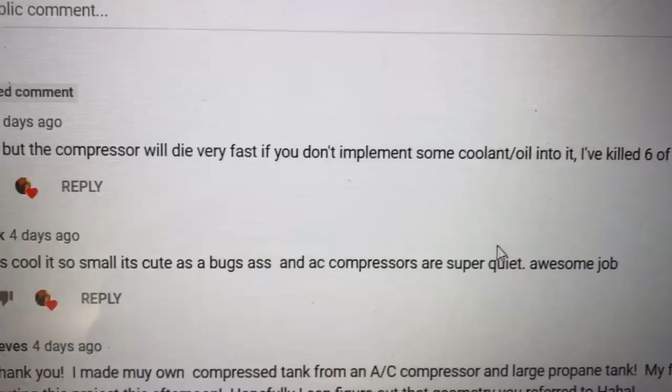Hey, what's up, fellas? This video is for Big Ogre, on behalf of what he said in one of my comment sections, on the AC compressor waste oil burner video. Let's check it out. He tells us the concept is great, but the compressor will die very fast. I've killed 6 of them, he says. So Big Ogre, I've got an idea, man.

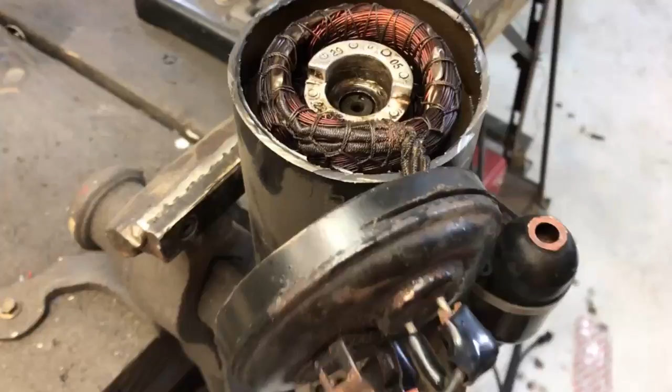Let's check this out. Okay, fellas, I've got one of these compressors chopped open here. We're going to take a look at it. And it appears that the air pressure comes from the center of the axle there. I've got just enough oil in this thing to where it starts to burp up.

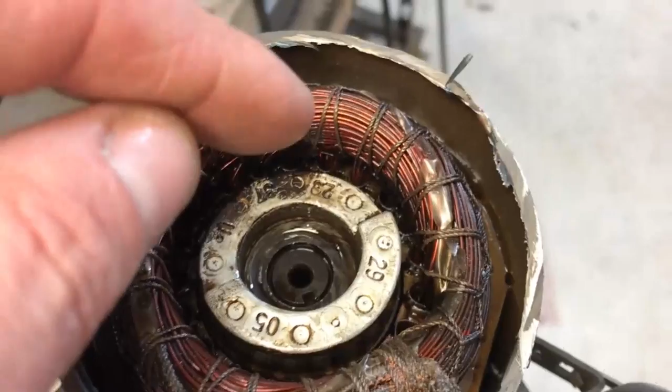Now, I think if we fill one of these up with enough oil to get it to do that, the convection and all that stuff from the oil and just from it sloshing around, the exterior container itself will be able to cool the oil off enough to keep this thing under 150 degrees Fahrenheit. Now, correct me if I'm wrong, I think this may be a class H varnish, which, if my memory serves me, can go up to 180 Celsius, which is hotter than hell. That sounds right, because I have read on the sides of these things before where it says danger, casing may reach temperatures of 360 degrees.

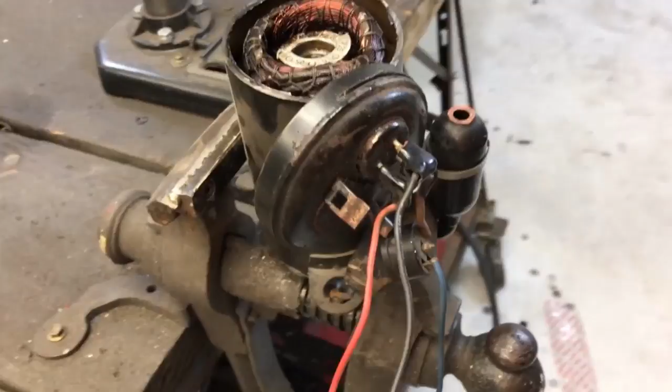I also want to point out something else I discovered during testing. This thermal shutoff switch has about a half ohm of resistance in it. I may take that out of the circuit altogether to increase the efficiency.

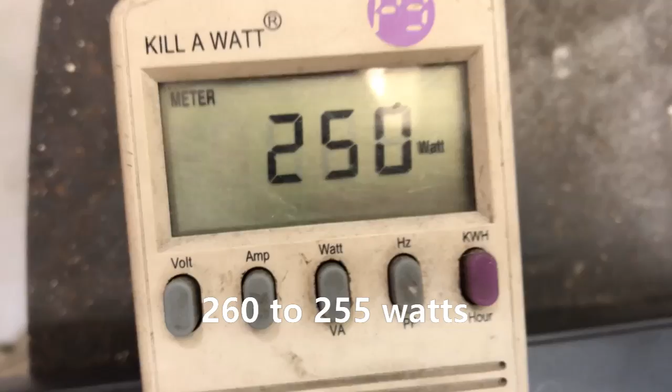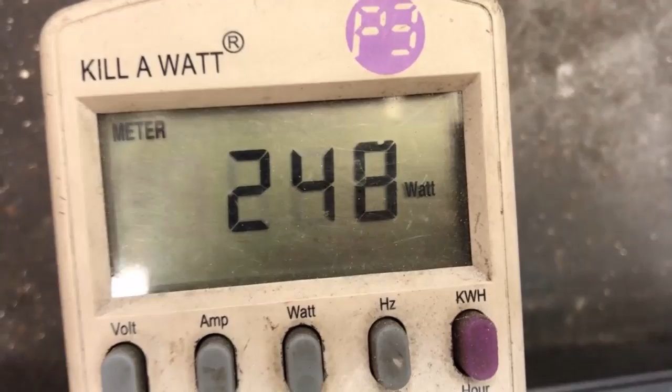Okay, this is the device running without the thermal switch. So we did get a little bit of a decrease in wattage there, guys. At no point was it ever hitting 40, I don't think, was it? I'll have to check the footage again. But we were hitting like 260 on the rig. So there you go.

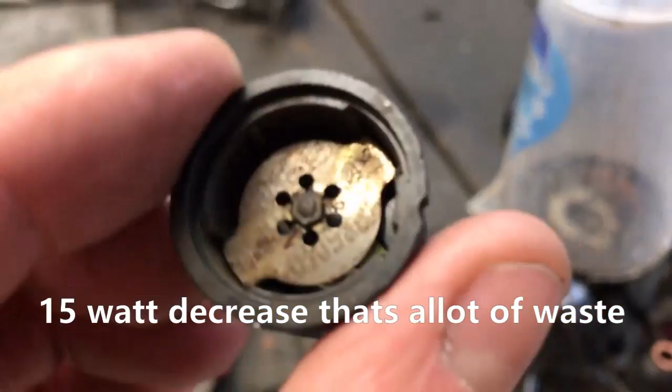Just deleting this thermal switch. They're probably just really old and corroded, guys. I bet you there's a contact surface in here that's got corrosion in it. So if you go to repurpose one of these, just remember that, fellas. I'd almost bet $1,000 that if we took this apart, we would find a contact surface in here which has become just as corroded as the rest of the unit.

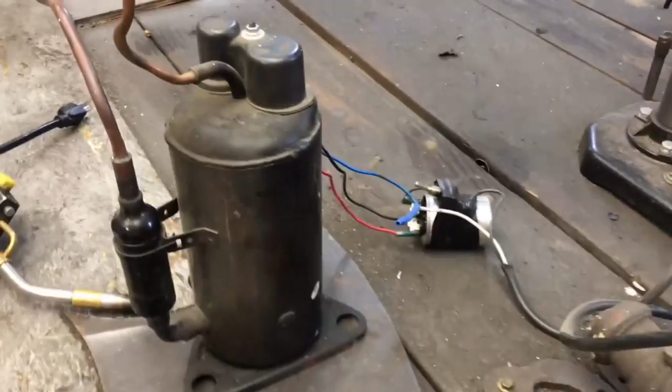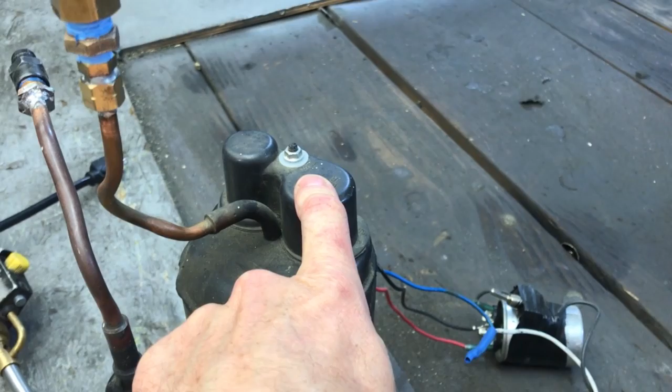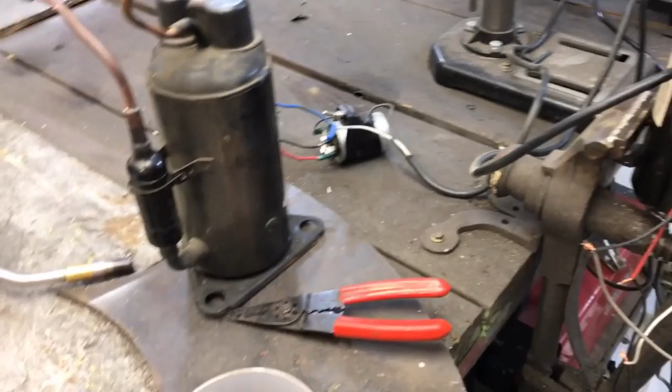Alright, fellas, so let's just make it a point from now on, if we're going to redo one of these, I am definitely taking this thing out of the circuit right away. The corrosion's got me freaked out. This one had 0.5 ohms. It was very low, but it was enough to make me run this test, and we did get some wattage out of that. Not much, we're talking 10 watts at the most, but if you consider the fact that some soldering irons are 25 watts, that's a little bit of heat, you know?

Okay, fellas, so basically what I've done is threaded this piece of 3/16 copper pipe with a number 10, 32 threads per inch. Did the same thing up inside of this sight glass as well, and just coupled it together. So hopefully this works as an oil return line.

I have also drained the tank. It was not easy drilling this hole without getting debris down inside there, I might add. I ended up pressurizing the tank and having it on its side, and for whatever reason I got sprayed with a bunch of oil. I thought it was empty, and I was wrong.

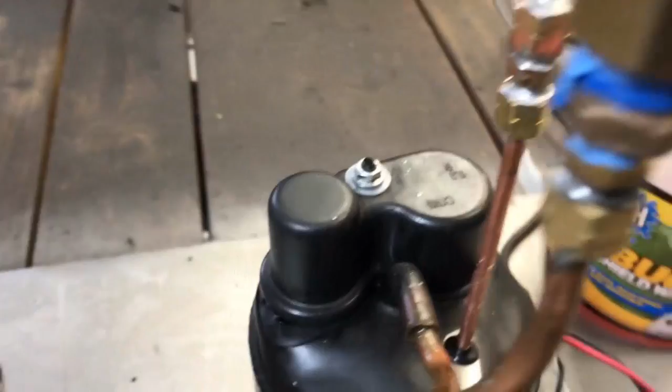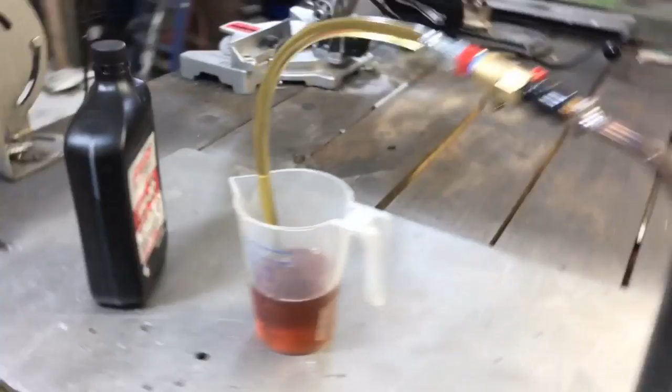Here we go. Wow, it is really having its way with that oil there. It took quite a bit. It is drawing air through this. I just want to give it a second. Okay, I'll give it a little more here. It draws oil quite quickly. Look at that. That's substantial.

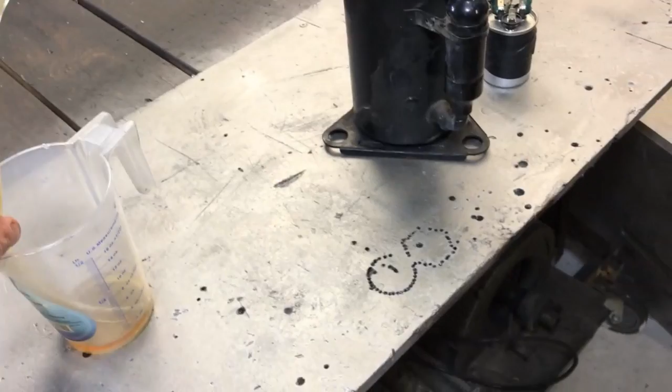This has got to be a miniature scroll compressor. Nothing yet coming up out of the other end. Okay, so we just drank about 12 ounces of fluid there. We're gonna fill it up with another 12 ounces. Here we go. Man, that thing has got an incredible draw.

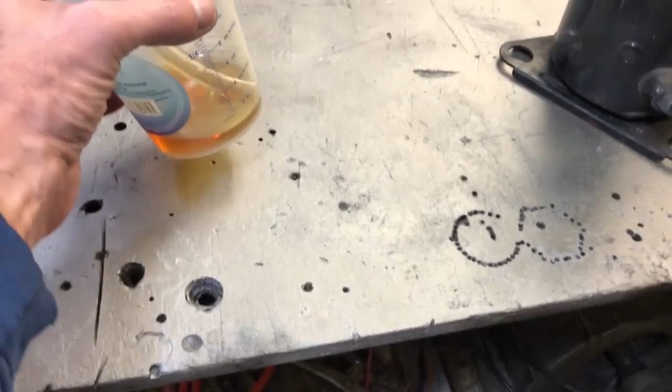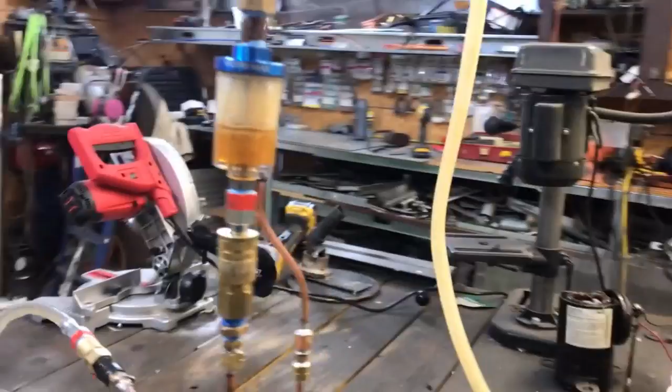Oh crap, there we go. We overdid it just a bit. And we're shooting oil out the ejection. There appears to be a bubble coming out that end, so apparently the flow rate is enough that my oil return line idea isn't gonna work.

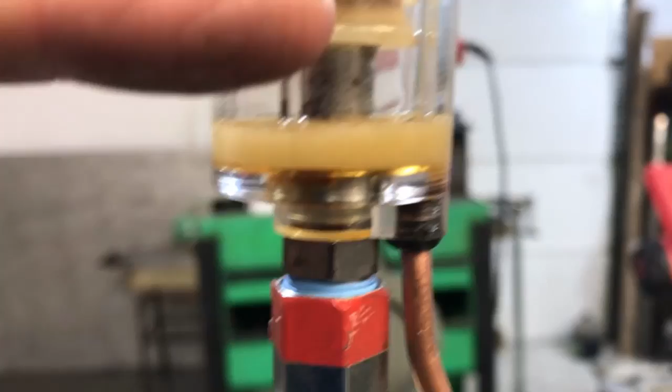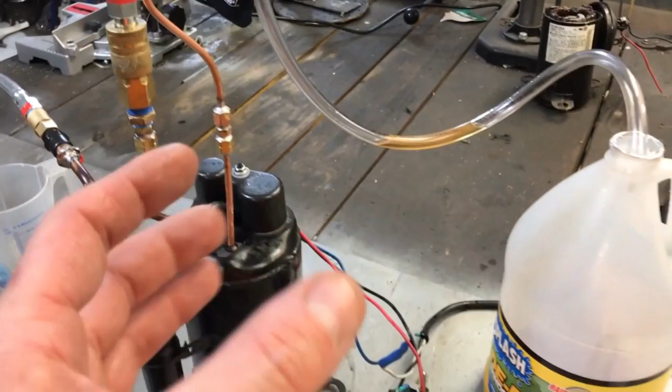Darn it. See if it drains back down in there though, at least. Yes, the oil is draining back down in there. So if we could get just enough oil in there to where the cup rides in this area maybe. I've got an idea. If we induce back pressure on the system, the size, the volume of the flow will be different. So we don't have any backflow being introduced.

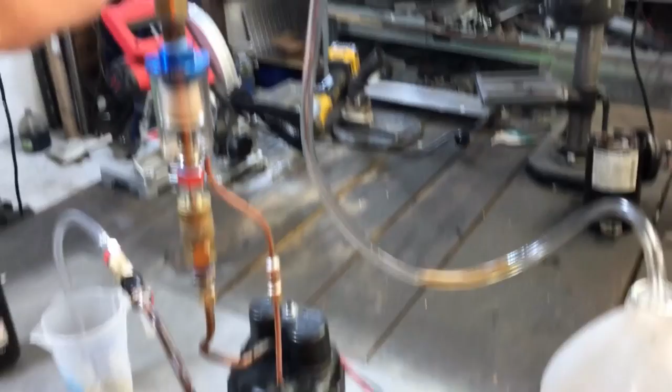Let's introduce some back pressure. So that's with high pressure. Look, no oil shooting up out of here now. But yet we're still getting good flow. Oh wow. Guys, we're getting suction in here. Can you see that?

It's making quite the mist. Dude, that is so cool. Ha! That's too awesome, man.

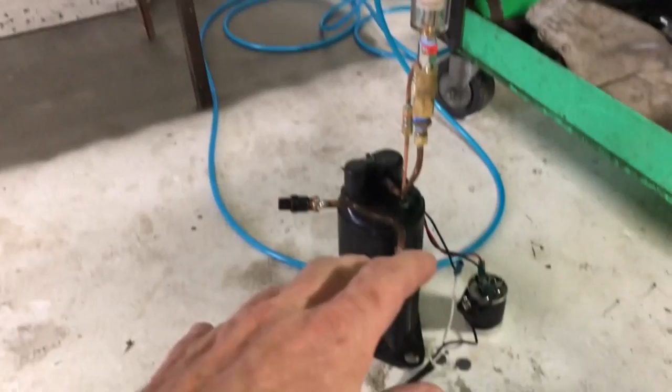Okay, fellas, here's the setup. We're just gonna go for it. I don't want to run any cooling on this thing right now. I want to see how durable these things are. I think it'd be best if we let this thing run and see what temperature it maxes out at.

This is 30 minutes in.

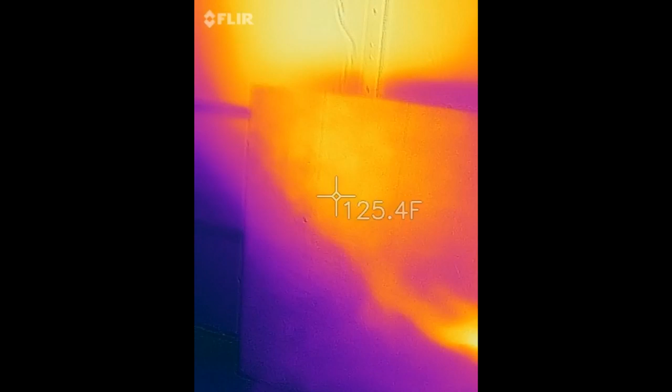Another reason I'm doing this video, fellas, is because I've decided I'm gonna write a small book on oil burners that puts together everything I've learned over the past couple years on this channel. As you guys know, I went full-time with this business, quit my job about a year ago, and I'm just kind of sailing the seven seas here right now.

So definitely a scary ride. It's worth every second of it, but a lot of people ask me for plans on these burners, and I don't really have them per se. They're in my lab book. So what I'm going to do is draft up a small book that I'm going to try and sell as an ebook online or a PDF or an actual really nice book.

I want to make a 150-page book made out of really nice glossy paper, kind of like one of them old chemistry books you used to see from back in the 1960s and 70s. Just a really nice page, really good pictures, high gloss paper with a bunch of really cool diagrams and some stuff like this out of my lab book.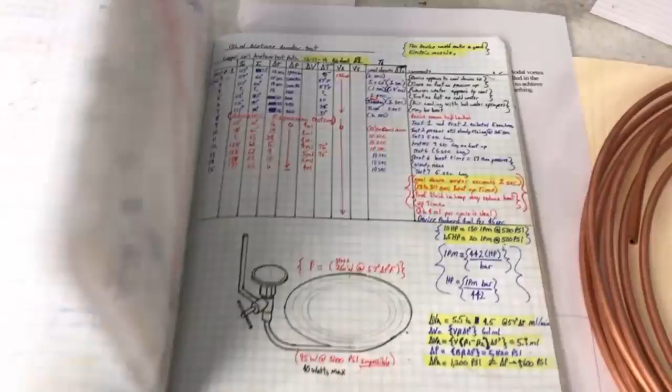All of this information, some of the pictures of this stuff running, the cost to make it - there's a lot of really cool stuff in this lab book that's just hidden away. And I'm not into the patent game, guys. I'm not trying to do that. I just want to help people out who want to build stuff themselves as well.

So there's going to be a lot of stuff out of this book. It's going to be in there. I was working on this diagram earlier. It's going to be chock full of really nice diagrams. My printer ain't working too good here.

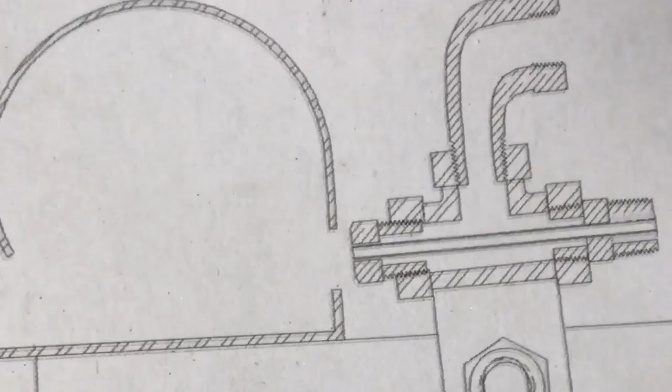But really super detailed diagrams that give you the exact dimensions of everything, where to get the parts. It's going to be a book about this thick, I've decided. But I want it to be a really nice book, man. I don't want to use these crappy yellow pages, like this here. I want it to be the best, most expensive paper I can get my hands on.

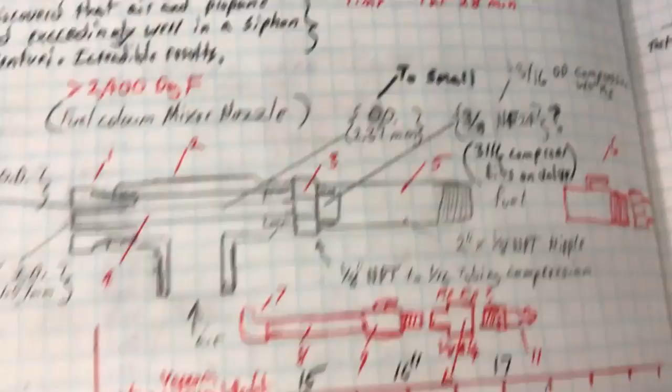I want it to be the type of book that a person is glad to own. And we're going to fill in all of these data sets on all of the burners that I've built, and we're going to just fill this book up full of all the designs and testing that I've done, all of the really serious details of nozzle configuration.

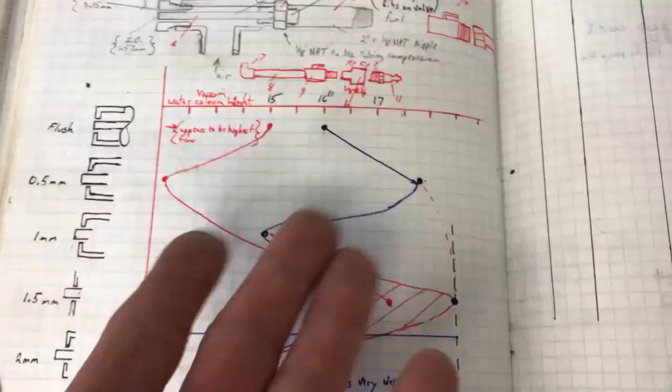We're going to have a lot of graphs and things like that that other people can read. Like, I can read this graph at the drop of a hat, but that's because I'm the author. A common person would look at this and be like, what the hell? And for good reason. But I can relay this in a much more coherent format than this.

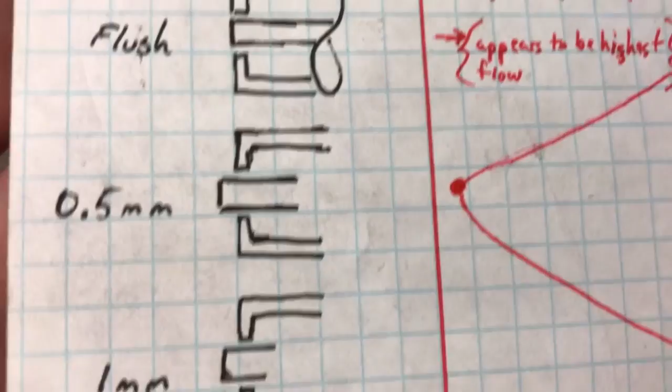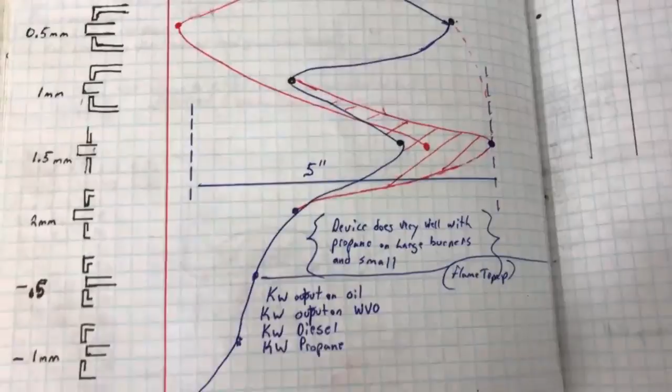This is basically just showing the effects of nozzle position in a Venturi setup. And it comes to find out that flush is in fact the best in most scenarios. But as you can see by this graph, we were definitely getting more draw with the nozzle sticking out. However, at lower settings, it doesn't work very well. So that's why all my nozzles have the interior fuel penstock flush.

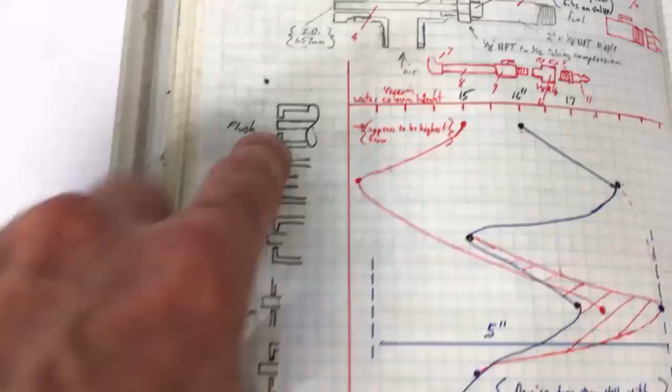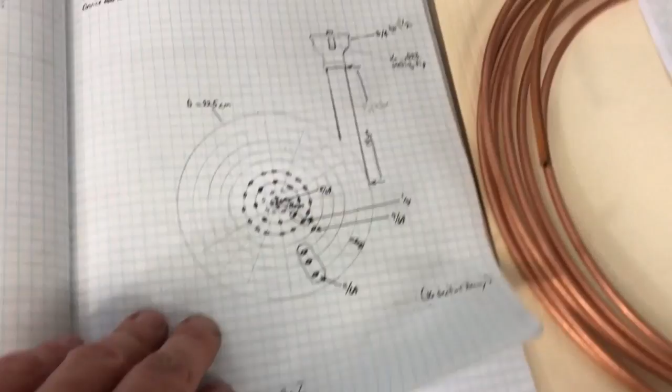Because look at what it does - it's all over the map depending on where you have it. So for the best universal configuration, it's here. This would just be cool stuff to have in that book. I've just got all this information on some exotic burners that I never intend to patent, but yet are just monsters, man. They work so well. So that's what we want to do.

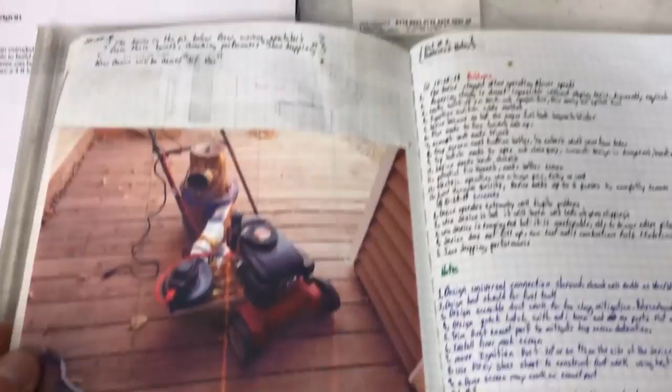It's a pretty cool book, man. I think we need to do something with it. You know what I'm saying?

So here's the scoop, fellas. I've got about 300 friends on YouTube that I comment with on a regular basis, and you guys have been keeping tabs on the crazy stuff going on with my personal life. So just let it be known, the next string of videos we're going to see, except for one review I have to do for a company, are all going to be to populate this book.

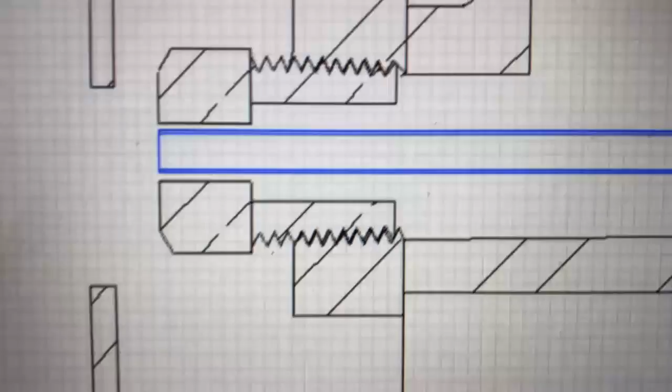Let me show you what we got here. I'm using a pretty cheap QuickCAD software to publish this thing, but I want to put some nice pictures, like of my glass wall experiments. This is a glass wall combustion chamber I did my first Little Dragon combustion burner test on, and it was a really cool video with a lot of really cool information. This is kind of how I want to format the book, with actual pictures of the machines working, as well as complex, easy to see diagrams that give you the exact dimensions, part number, part name, all that kind of stuff.

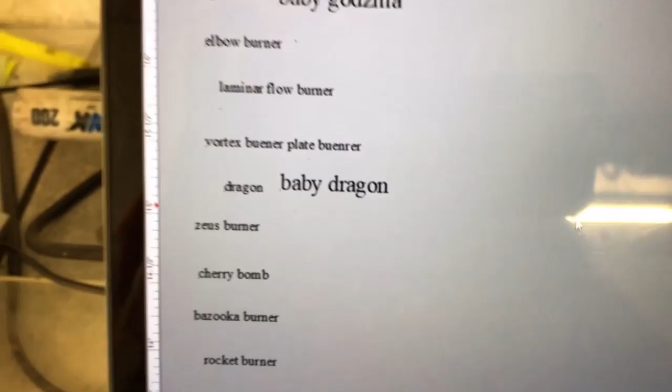And this list here is all the burners that are going to be in the book. We've seen all of these - sorry, I'm looking at the phone like an idiot - all of these burners are on the YouTube channel. But I just think it would be so cool to have these in a book that you can just grab and go straight to the burner you want to build.

I'm thinking about selling books on just specific burners too. So I might just sell a how-to manual on a particular one if you don't want the whole book, you know, like a little $5 PDF or something like that. So that's where I'm going. I'm just trying to do something that's another form of generating income.

Things are doing okay, but I need to amp this up by a factor of 50. We're just screwing around with all these oil burners and stuff, man. I've got ideas so much cooler than this that we could be messing around with, but I don't have the money to do anything with them. I think it'd just be a waste.

I've seen this type of book online that sells for up to $150 for forges and foundries, but they're all gas burners. Burning propane is expensive, man, and I get asked questions all the time from blacksmiths and the like, people wanting to convert because of their tank losing pressure or the cost.

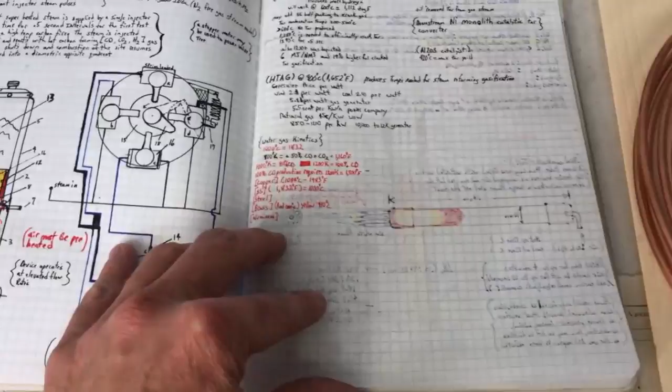So that's what we're going to do. When we come to a page in the book that may require the output of a specific burner, we're going to do a video that day for that page of the book and see what we come up with. We're going to take all the data and information out of this book and use it to make something amazing. I want to write a badass book, man, something that makes you want to pick it up and thumb through it.

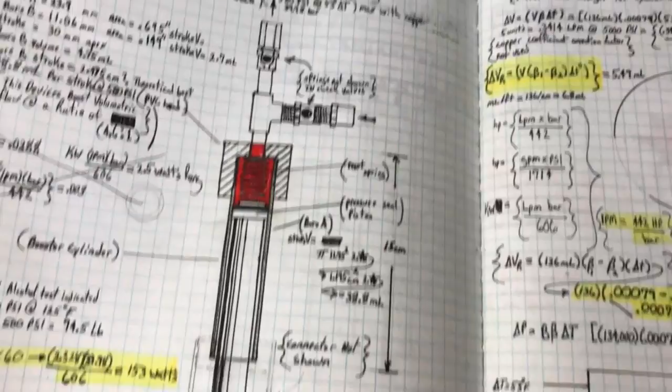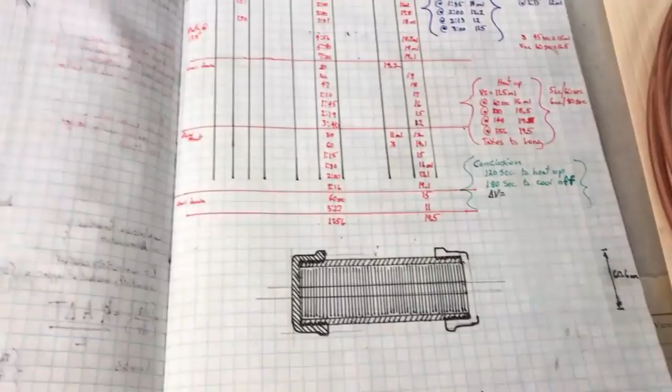When's the last time you picked up an awesome book just full of cool shit that you ain't never seen, man? When I was younger, you didn't have the internet, and I loved these kind of books, and they just don't exist anymore. It's something I gotta do, guys. I want to do it. I think there's a lot of stuff in here that isn't going in the book, but for the most part, man, I just think it'd be a huge waste not to.

So for you group of guys I've been talking with on a regular basis, give me your input on this. What do you guys think about this oil burner book? It's not just going to be oil burners, you know I don't do just that - it's going to be propane, all that stuff, showing you how to get out of any problem you might encounter in any process that requires a lot of heat. So I just don't know if it would be a wise idea to try and write a book this day and age. I mean, there's ones on Amazon that seem to be selling for $150, used for $75, for a foundry burner book.

Pretty cool books. I just don't know if anyone would buy it, so it could be a huge waste of my time. But I've got to try to find another way to generate income around here. We're puttering along, man, and I need to find something to kick it into fifth gear here.

So tell me what you think, fellas. Should I mess with this? Is this a waste of time? I mean, there's some really cool stuff in that lab book, and there's a lot of incoherent babbling all over my channel that in the right hands, someone with patience, someone with focus...

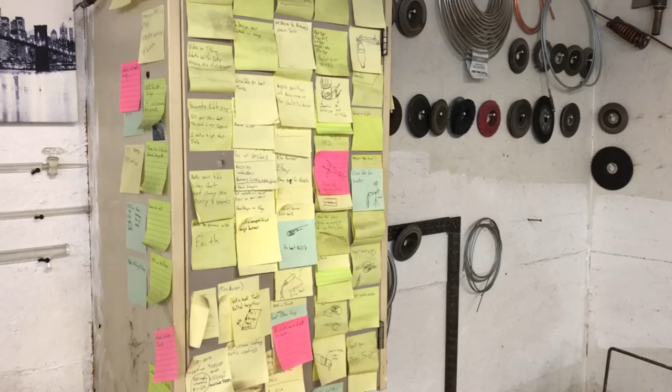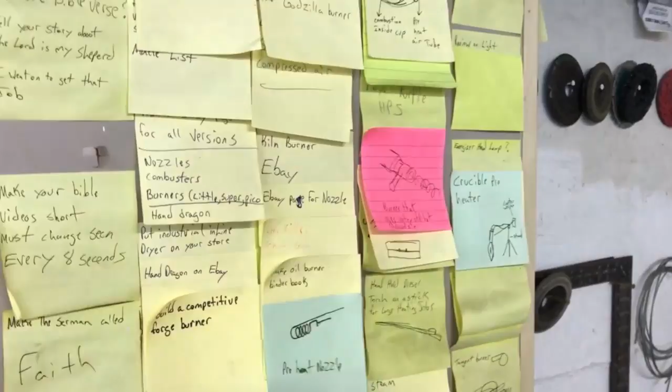That is not focus. Dude, I got Post-its on top of Post-its here, man. I'm never gonna finish. Are you kidding me, bro? Yeah, I'll get right on that tomorrow, brother. I've just got too many damn ideas, and it's not a good thing. It's not, because you just end up awash. I get carried away by the next exciting adventure without ever finishing the first journey.

So we're going to do this oil burner book one way or the other. And here's the thing, even if the book sucks in the sense that it doesn't sell, a lot of cool things don't sell, they're just, the pricing's bad. I will have that book to answer the questions that all my customers have. Just be able to flip it open, bam. I can kind of do that now, but things are a little scattered, and you got to know how to read Egyptian hieroglyphs sometimes.

So that's what I'm going to do, guys. I'm not going to be a prick and hide all my secrets to make money and sell burners to people who are fully capable of building their own. I'd rather just ruin the market for anyone else who might think of starting the business, spread the secrets everywhere, and help out people who want to build their own. You know what I mean? There's always that group of people who can't build their own, first of all, either because it would require them to buy about $1,000 worth of tools to do that.

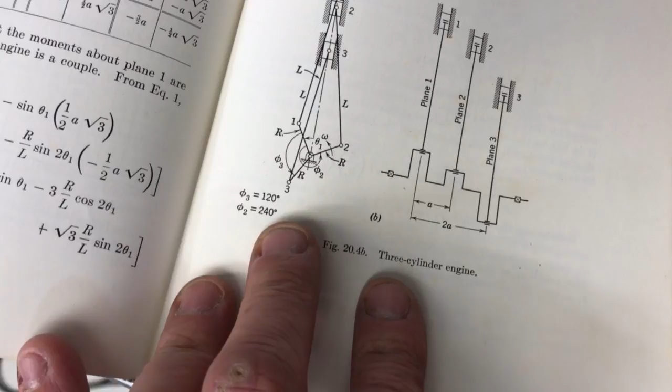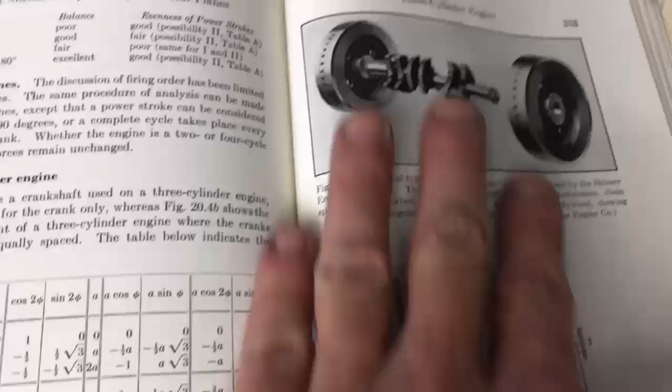This book here is older than I am, but the pages are still glossy. It's a really nice paper. This is a bad example because this book's just so old. This photo right here is just awesome, and this is a really old book. I don't think we're going to get any copyright info out of this thing. It's definitely older than me, but you can see it's just nicer looking.

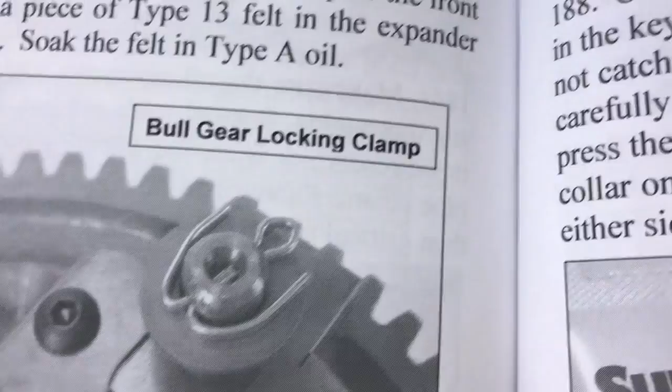So I don't know, let me know what you guys think, man. Is it worth wasting the money and making the book possibly too expensive? People might not want to buy it. So I don't know what I'm getting myself into here, fellas.

Let's look at the logistics. 150-page book, huh? So if you're a true champ and you pull off a page a day, which you won't, your girlfriend ain't gonna let that happen, your fiance I guess I should say, yeah this is gonna take a year. If I get a decent, really nice page cranked out every day, 2 pages a day, I could do it in 75 days, but...

It's kind of hard to try and do that. You want to put at least 3 or 4 hours into some of these pages. This is a technical book, this isn't a poetry book, so you got to kind of sit there. Sometimes producing a single sentence in this book will take me 4 hours of experimentation.

So yeah, maybe that's why I seen one version of this book was for $450. The first edition of Forge and Foundry Burners that I saw on Google Books was a $450 book. And when you look at the logistics of it all, you can kind of see why. The money that you will have to spend to populate the information of such a book is extraordinary. If you've already got the assets on hand, then hey, that's capital, right?